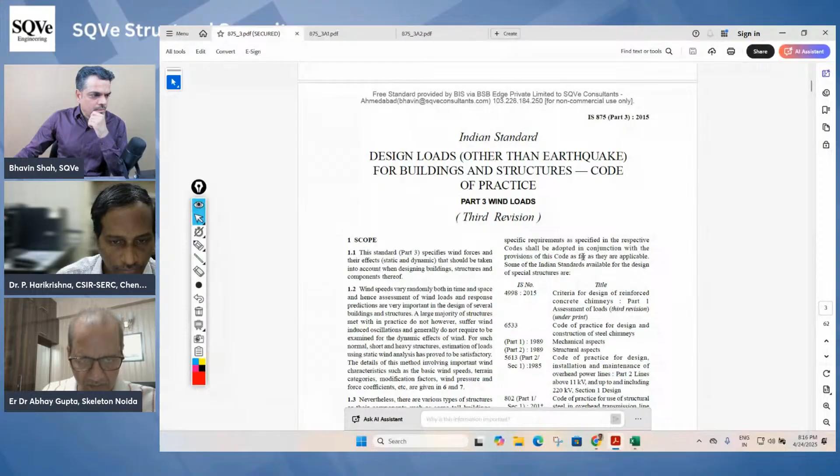Whether full screen is shared? Yes. Just zoom in a bit, make it a little bigger. Good.

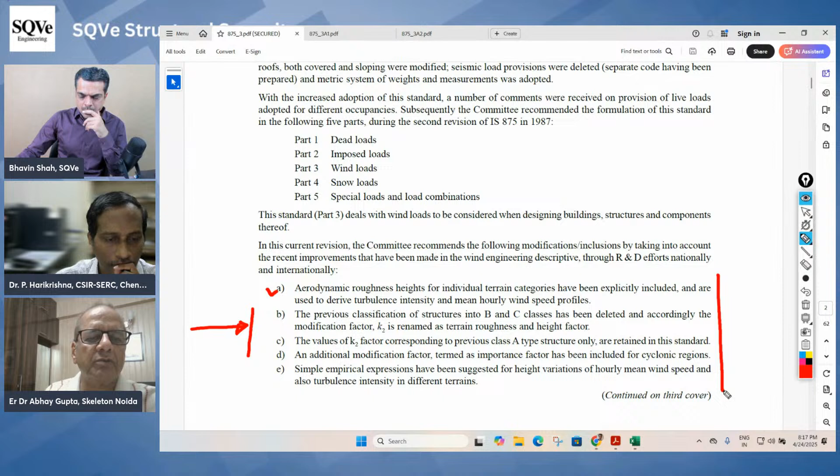Friends, just read the foreword of this code itself. Go up please. Here, just below, last para, below this load list, below this - yes. In this current revision, the committee recommends the following. These are the points which Dr. Harikrishna has just mentioned. So I will always recommend users, whenever there is a new version of the code, you should look for this particular para in the foreword. This gives a summary of all the changes done in the document. This is a good thing. So when the next version comes, again there will be a write-up here about all the changes made. Go down.

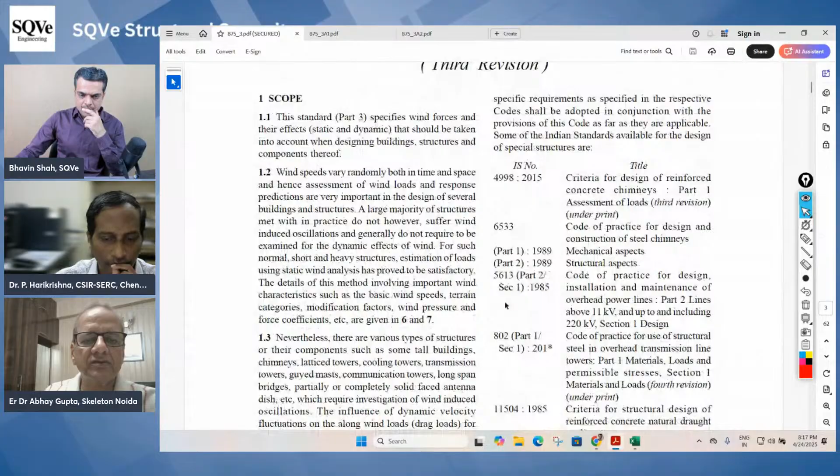These basic things will remain the same - scope and application. While making the final draft, we will see if any word or statement needs to be changed. But otherwise, more or less this introduction, reference, and terminology is going to remain the same.

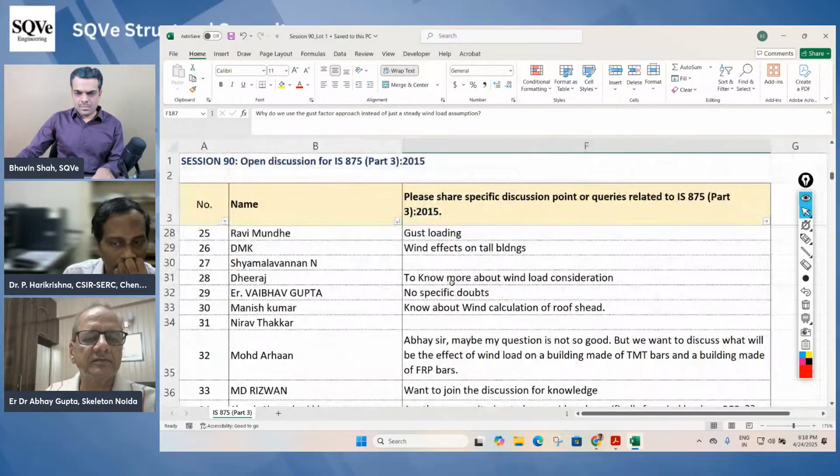Wind load calculation on transmission or communication towers. Dr. Harikrishna, would you like to elaborate on this particular point, how is this covered in 875?

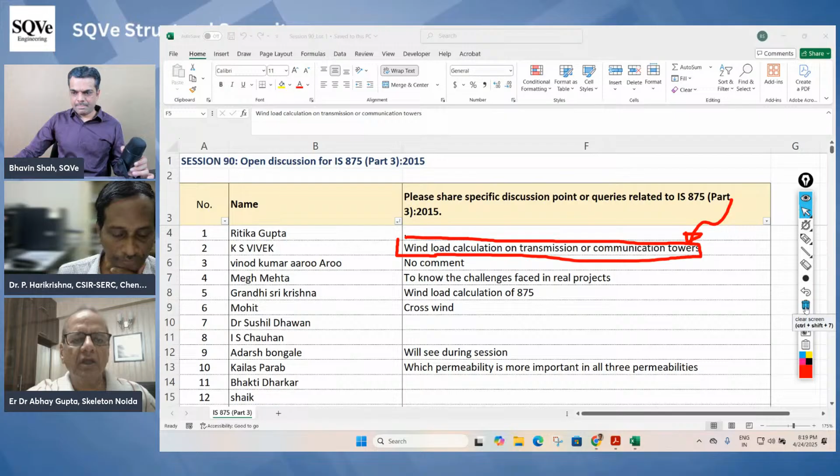875 Part 3 is more like a parent code, and there are additional codes of practice depending upon the type of structure. For example, IS 802 addresses transmission line towers, and very recently one more code has come that addresses communication towers. So the parent code remains IS 875 Part 3, but there are specialized clauses depending upon the type of structure through these additional codes of practice. Transmission tower is 802, and communication tower - I forgot the number, it's a very recent one - 16834 or something like that. That's available, and a very good thing is that all codes are available for free download for users nowadays from the BIS website. You just need to register and then download the things.

Regarding item number 5, wind load calculation of 875, I'm not going to deliberate on this much, but just for information, there is a handbook which already exists, SP64, and this updated version of that handbook will also be prepared simultaneously as the revision in the code takes place. So that handbook will provide proper simplification and explanation of the clauses, and even the wind load calculation for various structures will be there.

Coming down, which permeability is more important among all three permeabilities? All three means there are two permeabilities... is there a third one, Dr. Harikrishna? It is not like one is more important than the other, actually.

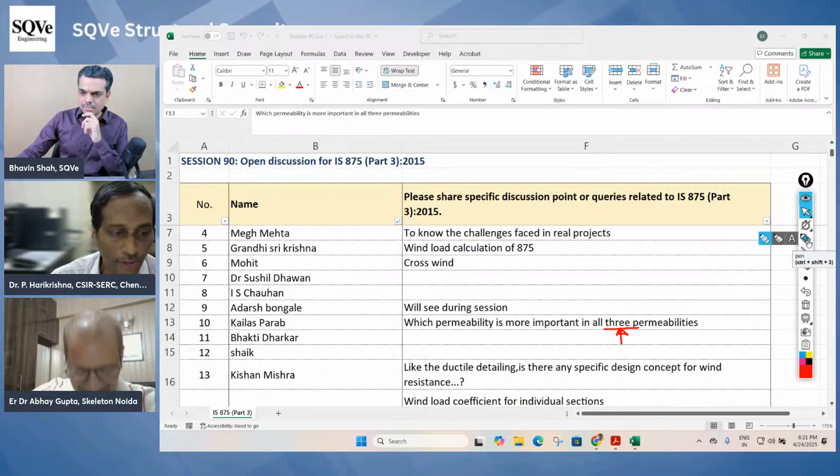It means there are three categories: low, medium, high. In reality, as a design engineer or end user, the building-specific permeabilities will be there, so it's not about which is important. You have to choose the category based on the number of openings in the building wall. The permeability has to be calculated based on the area of the openings on the walls relative to the total area of the walls.

To explain further, the wind flow pattern and wind pressure inside the enclosure change depending on the area and placement of the openings, and on whether the wind is leaving or entering the structure. That's why there are plus and minus values - pressure will be there and suction will also get created, and whether it is low, medium, or high depends on the area of the openings.

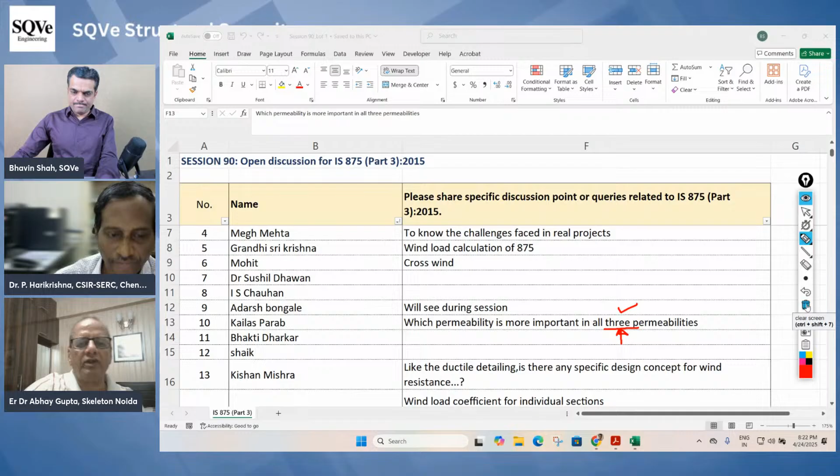For more detail, when you actually calculate, you will get to know. But you have to consider the entire area of the openings relative to the entire area of the walls. It is not for a specific wall - this is for the entire enclosure.

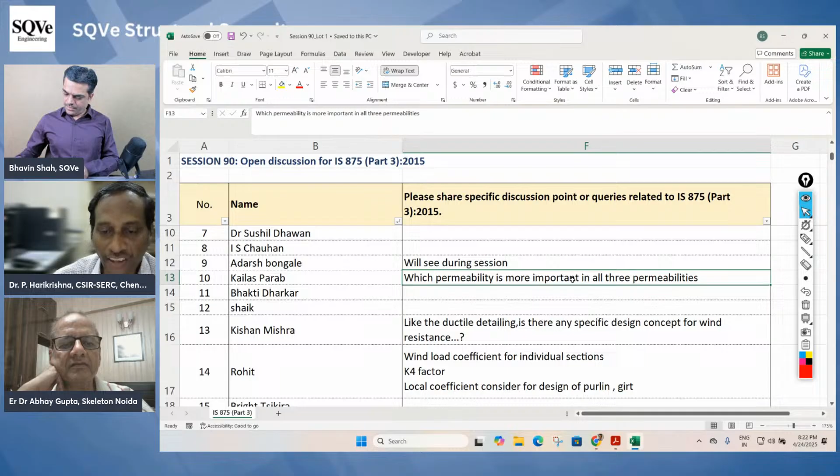But the assumption made in the code of practice is something like a worst case scenario. That means suppose there are 4 walls - one wall's opening got damaged, like during cyclones, while the other walls' openings are not damaged. That is the worst case scenario assumed, and corresponding values or magnitudes of coefficients are given in the code of practice. Whereas in reality, damage can happen to openings during a cyclone on more than just one wall - other walls' openings can also get damaged, but for conservative design purposes, it is assumed that the opening on one wall is damaged and all other 3 wall openings are intact.

That is the assumption. Now, point number 13 - regarding ductile detailing, is there any specific design concept for wind resistance? The basic philosophical difference between seismic and wind is that in seismic design, you go into the non-linear range of behavior, while wind, being a more frequently occurring daily phenomenon, causes the structure to behave elastically. So in wind design, there is no ductility concept or ductility requirement.

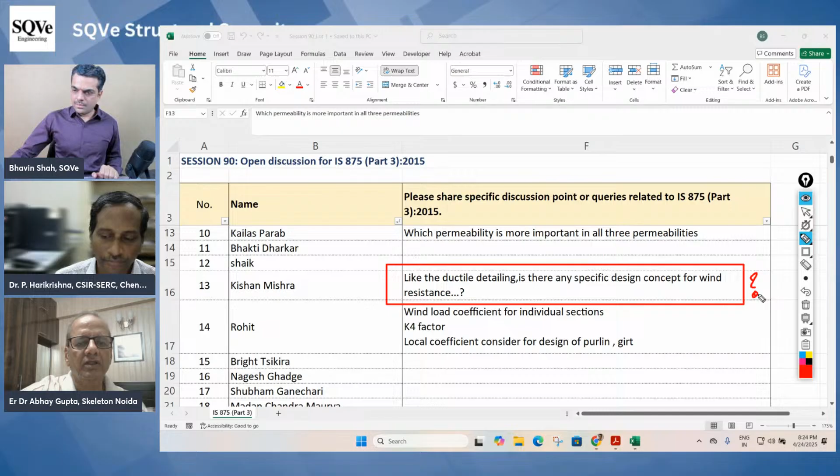Wind load coefficient for individual sections - it's already there, and I expect more or less no change will be made. Now, the K4 factor.

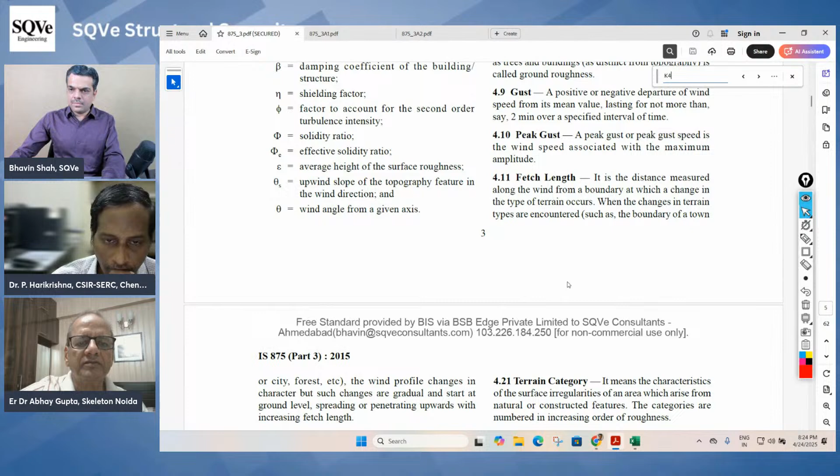K4 factor - Dr. Krishna, you can elaborate more on this. Can we see that clause, the K4 factor? Please scroll down. Next, yeah.

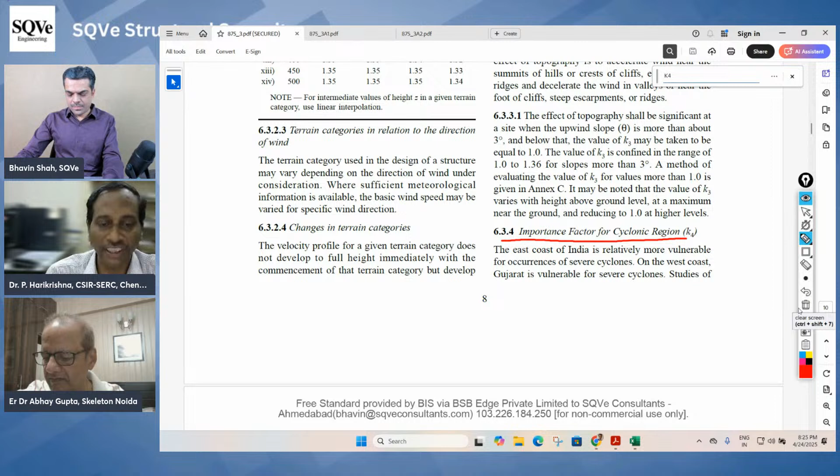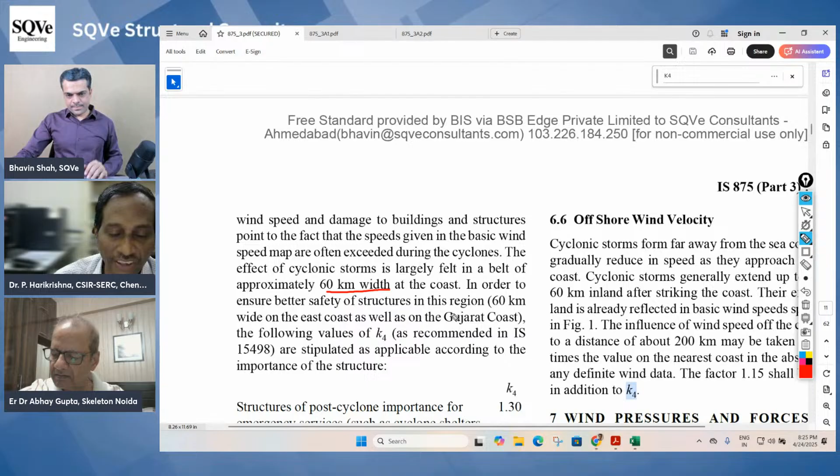This is another factor which was introduced in the 2015 version, which I didn't mention in the earlier remarks. It is basically limited to the coastal regions of India, mostly on the east coast and also the Gujarat coast. About 60 kilometers from the coast, this factor has to be applied. The magnitudes are derived based on cyclone wind speed data, and the factor derived on a design basis - rationally, a factor of 1.3 is arrived at and recommended.

One more rationale adopted here is that this 1.3 factor needs to be applied only for post-cyclone important structures, so we don't want to overtax this factor. Suppose a 1.3 factor on velocity means forces will increase by the order of 69% - that means around 70% increase in the loads.

So this does not warrant us to adopt it for every building and structure, but this 1.3 factor is recommended for post-cyclone important structures like cyclone shelters, hospitals, schools, communication towers, etc. That means these structures are not expected to get damaged during cyclones, so they continue to function even after the cyclone. For general buildings and structures, it is still recommended to take only 1.0, as good as any normal non-cyclonic region. That means even though some damage levels are expected during a cyclone, they are acceptable for these general structures.

Between 1.3 and 1, one more factor is introduced, that is 1.15, which is again a ratio between 1.3 and 1. It is a simple design rationale, and it is recommended for industrial structures, because industrial structures are the ones which collapse or get damaged during cyclones, and they have post-damage implications. That is the reason this additional class is introduced.

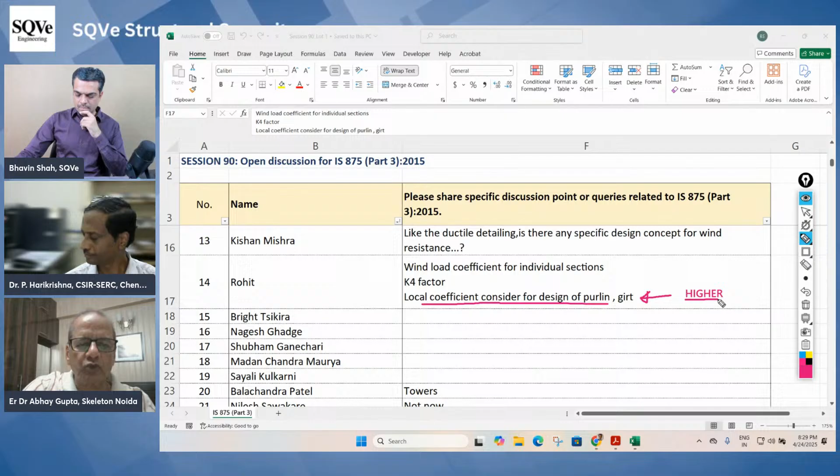Purlins and girts cover a smaller area, while when the same force gets transferred to the main structure, it is distributed from a larger number of elements, so the net effect is lesser. So for the design of the main frame, the area averaging factor will reduce, whereas for local members it will be higher. Moreover, for purlins and girts near edges, corners, ridges, and peaks, where local peak pressure coefficients are given, we should check the design for those local peak pressure coefficients, either by increasing the section or by reducing the spacing of members in those zones. That care should be taken, because otherwise the cladding starts coming out from that corner.

Okay, go down. Towers already explained, there are two separate codes.

Teaching profession, want to acquaint with the latest in wind engineering? Yeah, these are good documents for you, this code and the handbook, and some more structure-specific codes.

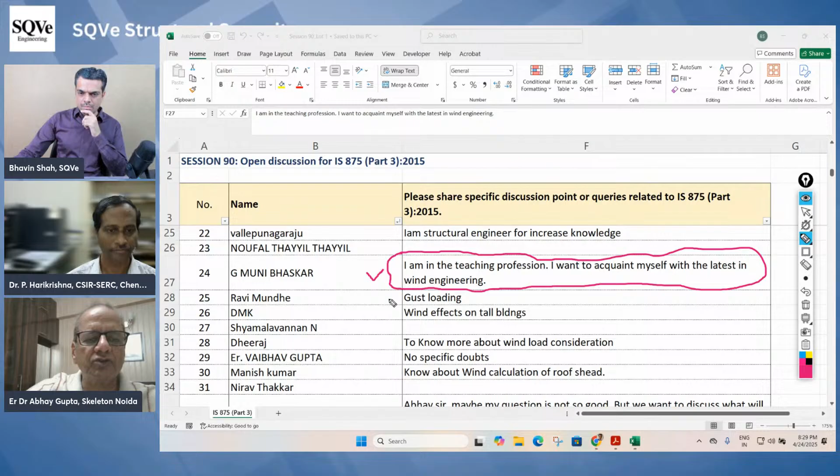But occasionally there are some short-term programs being run by SERC Chennai, under Dr. Krishna and other team members. So whenever you get information of that kind, you can keep in touch and make good use of them.

Gust loading is already there as far as along-wind is concerned. Crosswind is also there, and as such, we do not expect any change in those formulations given, except—Dr. Krishna, what about the crosswind? Are we going to make some changes in the crosswind? Because we are facing difficulty. As a user, I am also facing difficulty with the crosswind. Yeah, I mean, crosswind is more like a wide open challenge.

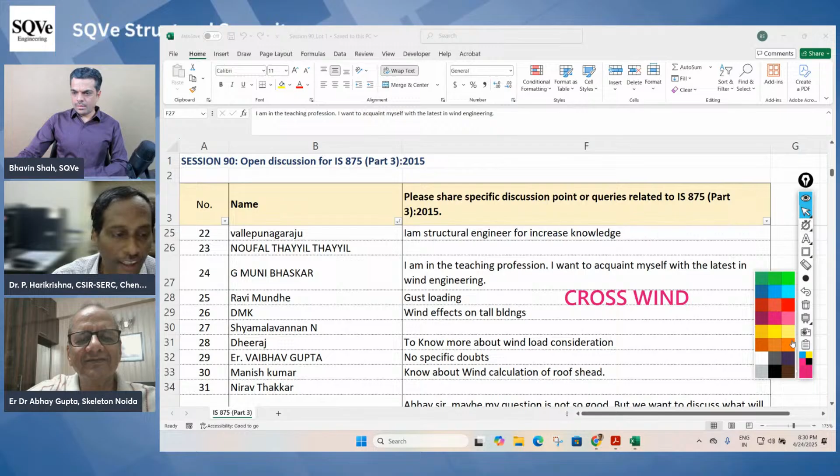That is the reason most codes, for example if you take the American code, ASCE 7, clearly state that they don't make any recommendation for crosswind load calculation, but recommend approaching database-assisted design approaches. That means there are some authentic websites maintained by reputed American universities, and you approach that website, and whatever results are provided there, you can borrow and use for your design load calculation.

So that is the case of ASCE. And whatever current version of IS code provisions are for the crosswind spectra, they are actually borrowed from the Australian code, but they are very limited cases only. But if I take parallel reference, the Japan code and ISO code are well ahead relative to other codes. More rectangular building cases were tested in wind tunnels, and the codal recommendations cover at least a wide range of cases, unlike the Australian code, which is very limited.

Which are those documents you just mentioned? Yeah, ISO and Japan code. Yes, wind load code. So is this ISO wind load code available to the public? No, it is not available to the public, you can procure it by purchase or something like that.

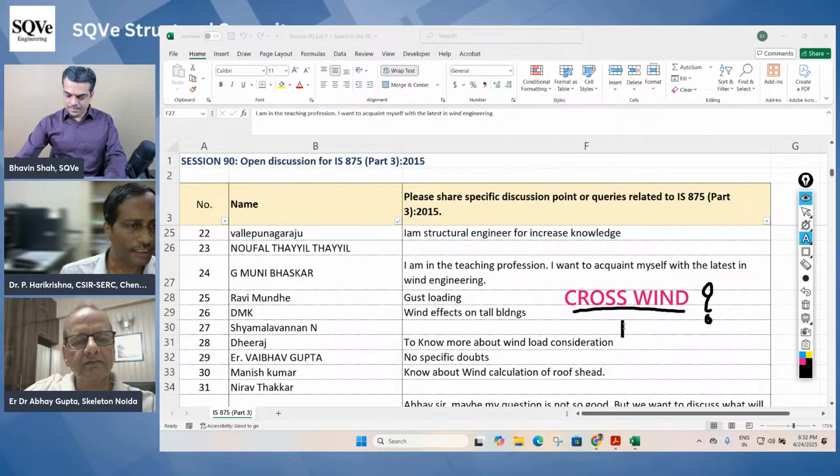ISO 4354, and the other one is the Japan code, AIJ, which is recommendations for loads on buildings. So these two documents can be referred by users for more clarity on the phenomena.

Thank you. In the current revision, we are going to take help of these two codes and look at the commonalities and better provisions if anything is there. We will be adopting those things.

And apart from that, I want to add that at SERC we have taken up a new ongoing project adopting machine learning techniques. We want to provide a user-friendly solution for this complex phenomena, that is crosswind force spectra.

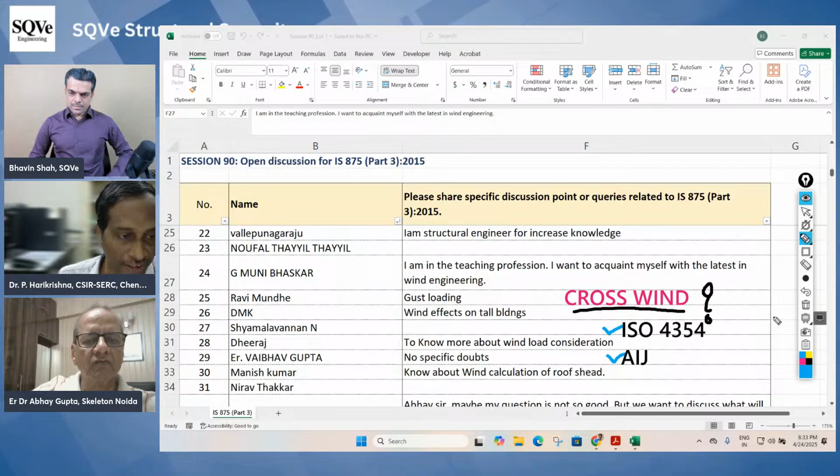Excellent. Thank you. We can also include the names and numbers of these reference documents in the foreword when we come out with the new revision.

Next, no specific query about wind calculation of roof shed. That is a separate thing, it's already there. But sir, maybe my question is not so good, we want to discuss what will be

the effect of wind load on a building made of TMT bars versus a building made of FRP bars. As such, no effect, because wind doesn't get changed due to the internal reinforcement nature. It is basically a surface phenomenon which depends on the geometry, shape, exposed area, all those things. So reinforcement will not make any difference.

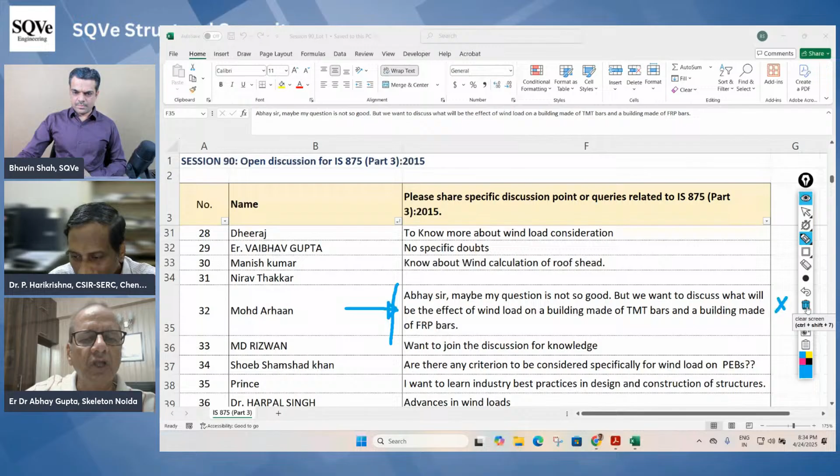Are there any criteria to be considered specifically for wind load on PEBs? Many of the charts and tables given are applicable to PEB sheds owing to their geometry, shape, size and dimensions.

So you can very well pick up all the CPE external pressure coefficients and internal pressure coefficients from the current knowledge and information available in the code.

Advances in wind loads. As Dr. Harikrishna has said, there are many new things which have come up in the last 10 years since this code was there, 2015, and we'll be trying to accommodate them.

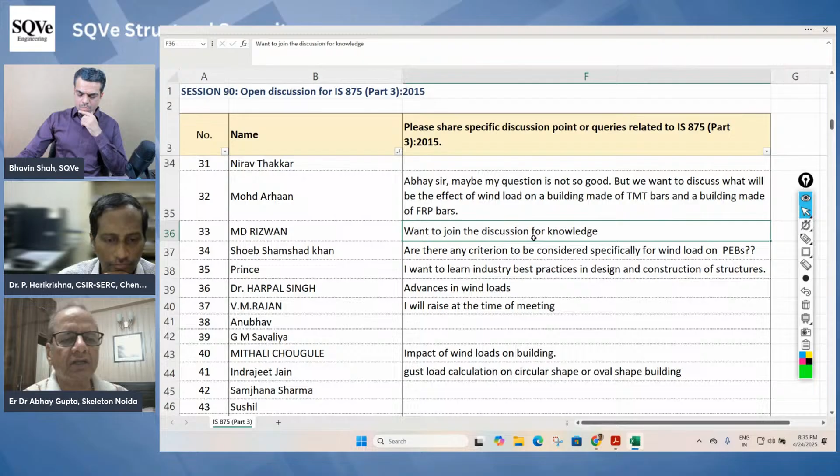But if you want to know more about that, I think Dr. Harikrishna, if you can suggest some good reading material from where a user can get more information about wind load. One is about the regular conferences.

We have books, and there's a national conference on wind engineering every year. A very famous author is Simiu and Scanlan, and Professor Simiu, American professor, has two books published, and the latest versions are the preferred ones.

And apart from that, one more book by Professor John D. Holmes, Australian professor. So these two books are preferred. But I think the Australian handbook is also a very good document, it gives examples and the concepts behind the clauses available.

And there is an annual wind engineering conference happening in India. This time in November it is going to be in VNIT Nagpur. That annual event attracts many good people from across India and outside also, so you can certainly participate.

Mr. Rajan, I'll raise it at the time of the meeting, please type your queries and then we'll see them. Sir, parallelly there are queries being typed in the chat box. Sri Subramanian Narayan sir has also already raised a few comments. Okay, okay.

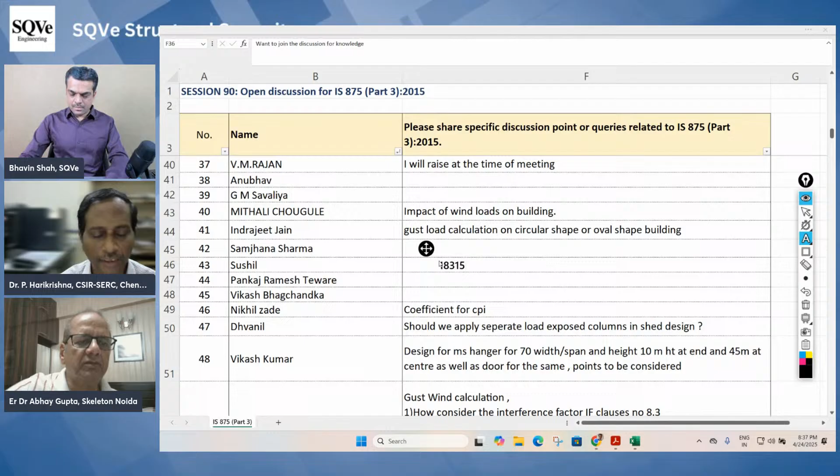Is it that Arnab Sarkar worked on this? Yes sir. So what was done is that whatever K4 factor is there right now in the 2015 version, it was actually derived way back in the 90s, using whatever data was available at that time.

And subsequently, in the recent past, a similar exercise was carried out by Professor Arnab from IIT BHU. It has corroborated or reconfirmed that those values still hold good with additional data available. That exercise was sponsored by the Bureau of Indian Standards, and subsequent to that exercise, a new code was introduced, 18315.

So for the K4 factor, it is actually the same as whatever is currently in practice, except that it is now given in a formula form. That's all.

Saurabh Gupta is asking, there are many times when we see a mix-up of codes, IS wind with AISC design. In AISC design, due to 700 years return period, wind coefficient reduces in load combination. What should we practice and advise for those? What is this, sir?

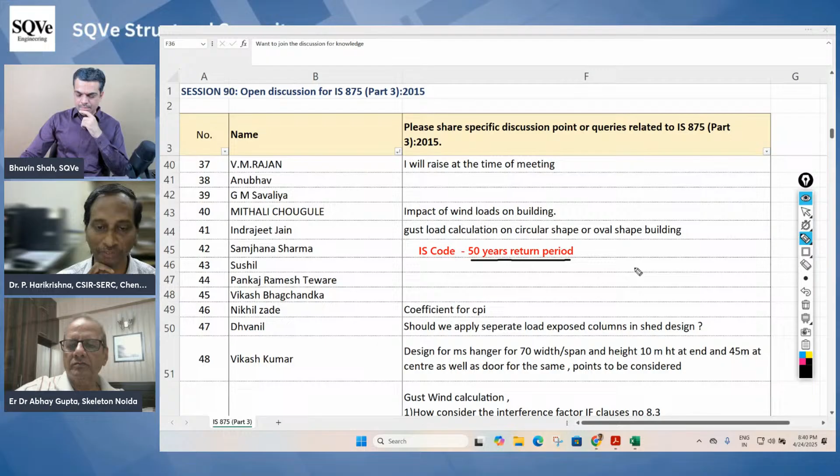We should not pick and choose parameters and values from different codes and then try to evaluate and compare. I'm sure you will end up with a wide scatter.

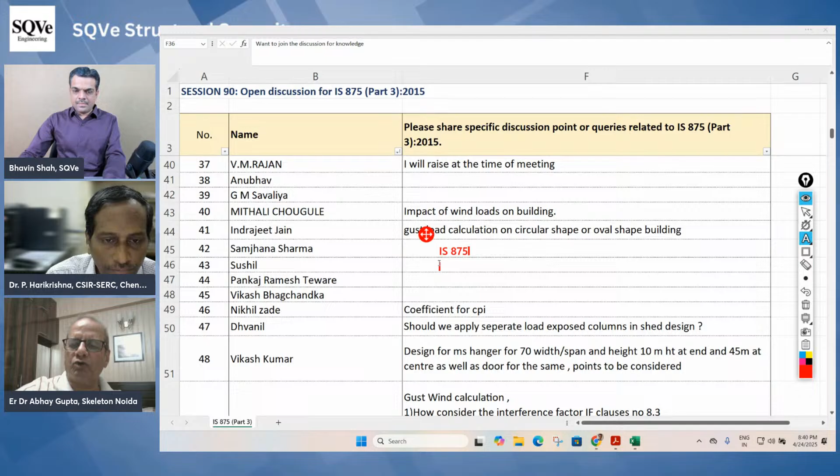Mr. VM Rajan has raised a very good point that for arriving at mean wind speed and gust, IS 875 part 3 uses 3 seconds and 1 hour for static and dynamic methods. But as per Eurocode, 10-minute interval is used for both methods. Why so variation in our code?

It is similar to return period, which is a yearly basic thing. The other point is that within 1 hour, wind fluctuates. So for that, there must be a reference averaging period. We call it the averaging period.

Since wind is a dynamic and random phenomena, it continuously changes with time, but we should fix a value. For fixing a value, the reference is: one, at what height should it be measured, and second, average over what period. These two questions should be kept in mind when we state any number about wind speed.

The guidelines are that mean wind speed can be averaged between 10 minutes to 1 hour. That is one guideline internationally. So you can choose anywhere between 10 minutes to 1 hour to address the mean wind speed. IS code uses 1 hour, Australian code uses 1 hour. Whatever point was raised, 10 minutes is used in a particular code. There are other codes where they use 20 minutes also. So it varies from code to code, but what you should keep in mind is that they represent the mean wind speed.

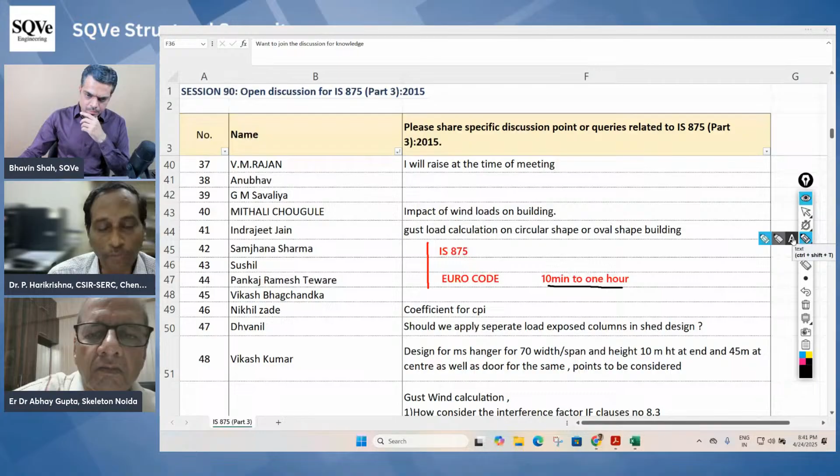Similarly, 3-second gust is a short duration we call it, with averaging period of 3 seconds. If you approach other international codes, you may see other than 3 seconds, like 5 second, 10 second, or even 1 second. So there are different notations and definitions. You should compare oranges versus oranges only, never apples versus oranges.

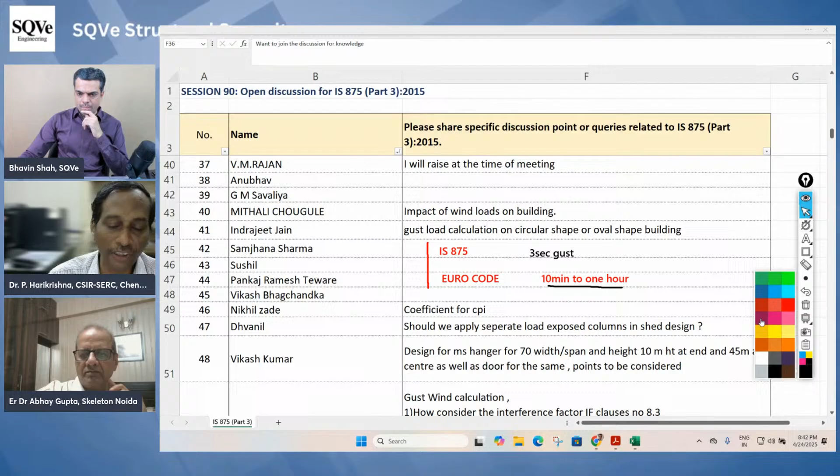If the codes have different return periods or different averaging gust periods, the magnitudes should not be compared directly. You should bring them to a common platform. There are conversion factors available which you can adopt. If I want to derive 10-minute wind speed from 3-second gust, I can derive it, and similarly if I know 10-minute wind speed, I can derive the 3-second gust wind speed. So you should bring them to a common platform, only then can you compare across international codes. Till that time, it is not recommended to compare design wind loads from one code to another.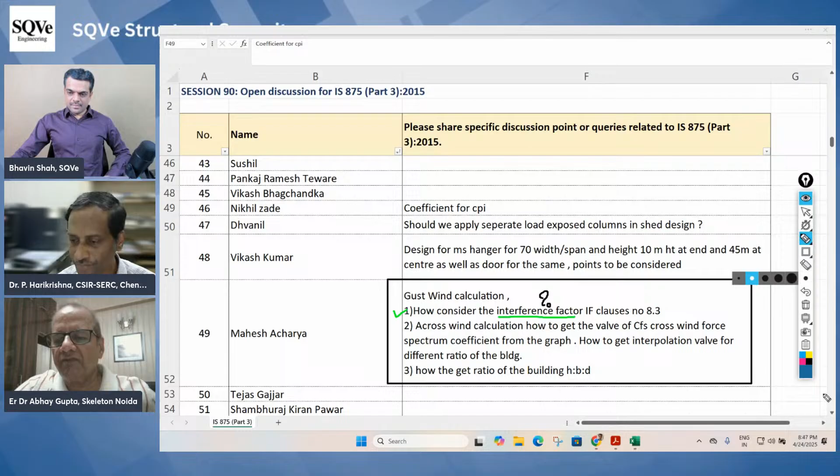Dr. Subramanian is saying, due to global warming, the wind loads are increasing worldwide. Will the new code increase the wind loads due to this? In fact, rain intensity is also increasing. I think there is more data available from IMD, but how well is the effect captured? Dr. Harikrishna, do we have any information?

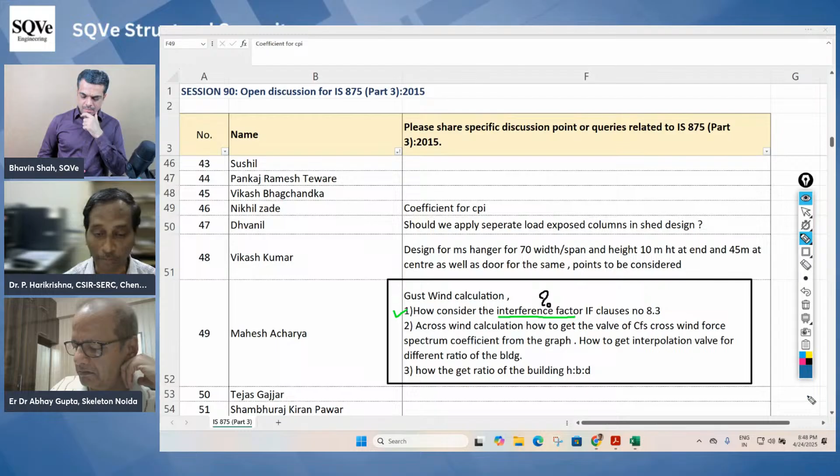Yeah, it is a rapidly changing phenomenon, this global warming or climate change impact. If I take 1990 to 2000, 2000 to 2010, and 2010 onwards, looking at the Indian coast, especially the cyclones, we hear very frequently that a cyclone formed and crossed the Indian coast. Earlier, between 2000 to 2010, I rarely heard about many cyclones. Very few were there. In 2013 I remember one, in 2017 as well, whereas subsequently it is happening every year. The magnitudes may not be significant, but with more frequency, there is more chance of high intensity wind happening.

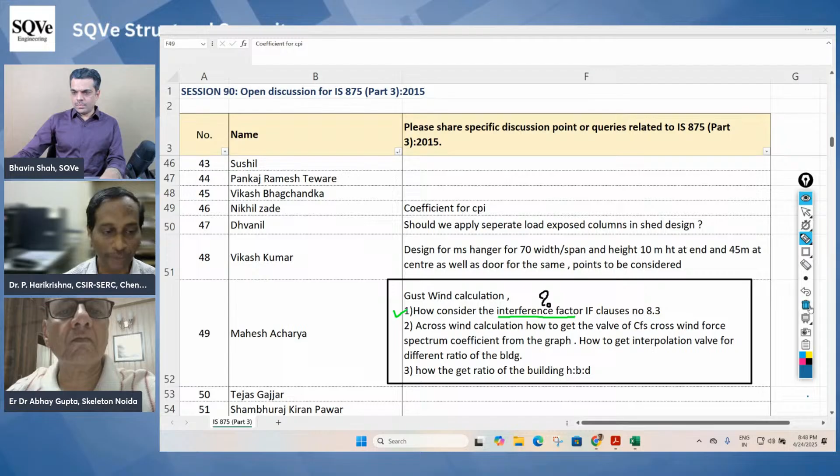So the point raised by Dr. Subramanian Narayanan is how do we address it? Till more reliable data is available, if I take the example of the Australian code, they introduced a factor called the climate change factor. It says you apply 1.05 on any design wind speed, which is only rational, just a 5% increase. What we are trying to do is that if I choose a higher wind speed or higher wind load, I am trying to minimize the risk, reducing the risk level. People think that whatever wind loads, earthquake loads, or other environmental loads are estimated through code, those are not fixed values, they are only probabilistic values. So choosing higher values is on the conservative side so that I can reduce the risk.

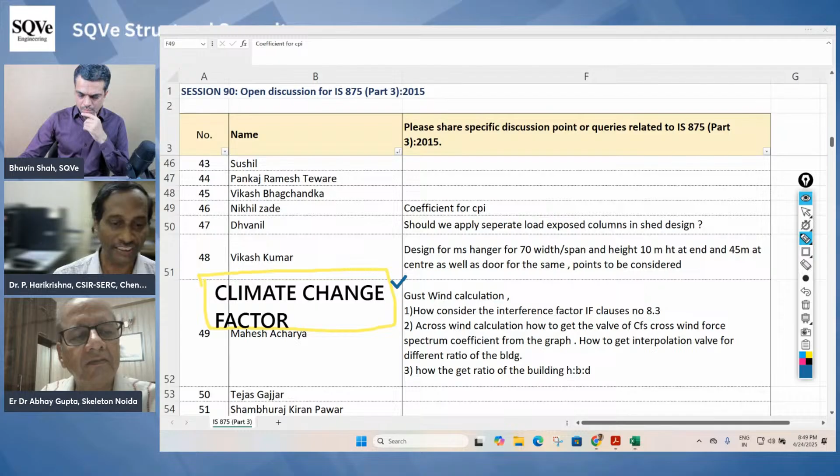For example, before the knowledge of wind engineering existed, there were a lot of tall buildings and structures like the Eiffel Tower. They were all constructed before wind engineering became a specialization. So how could they have constructed such an iconic tower that is still standing the test of time? The reason is that when the knowledge is not there, we need to adopt some additional factor of safety to address the uncertainties. Sometimes these factors of safety are called ignorance factors.

Similarly, with this global warming, I feel it is a rapidly changing phenomenon. The data availability is more like recent past, about 10 to 20 years. If I want to extrapolate with that limited data to 100 years or 50 years, there are reliability related issues. Till that time, people can adopt rational factors.

The next question from Mr. Mahesh Acharya is about the crosswind calculation. How to get the value of CFS, crosswind force spectrum coefficient, from the graph? Can we just see that crosswind force spectrum graph in the code?

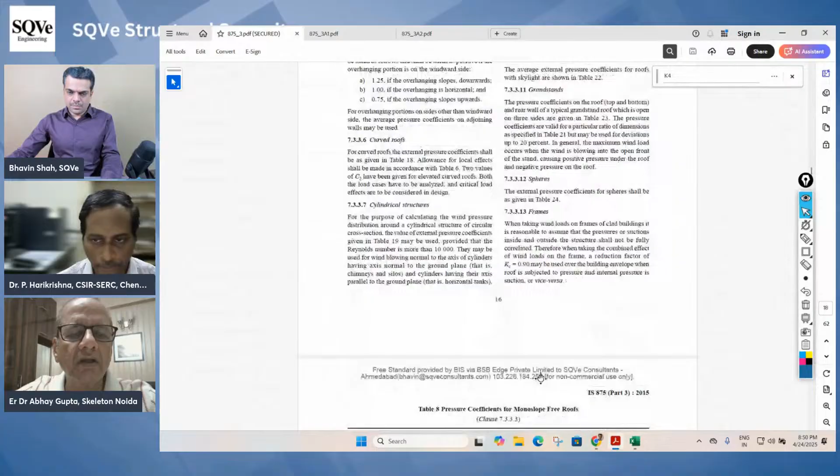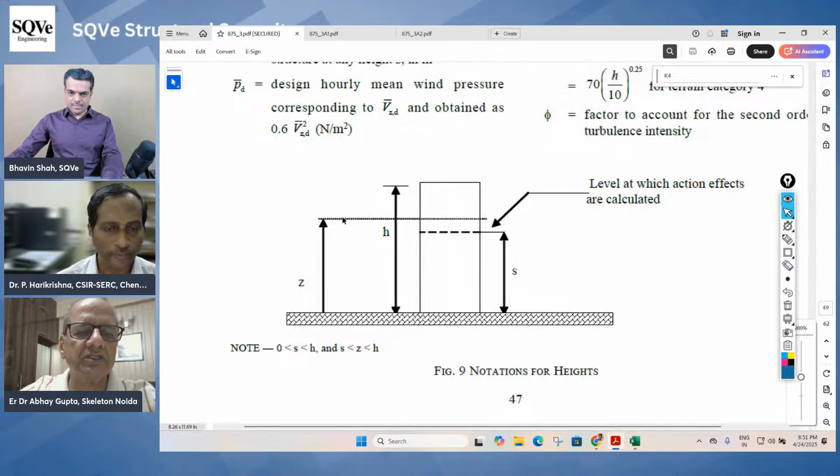Yeah, it will be much below, almost at the end. Before crosswind, because we are moving to that clause, Sri Harshal Goyal raised a question earlier on head-on case. Yes, there is one picture here. Go up, slightly... yes, this one. Can you zoom this in? Zoom in please.

Harshal is asking to elaborate the difference between Z and S. So let us say S is not there, S equal to 0. My interest is, see, this is like a cantilever structure which is vertically mounted. On this cantilever beam, wind acts laterally. If you imagine this cantilever beam in horizontal form, the lateral load will be vertically acting. This load is temporally changing with both space and time.

So it is a random phenomena. From that, I am trying to get a peak load effect at the bottom of the building. So there will be a lot of correlation related issues. Things can happen in a localized manner. The peak effects will be localized, and reduced peak effects will be there at a global level. So to address that aspect, this factor small s is introduced.

So let us say if I make S equal to 0, it means my point of interest is that at the bottom of the building, what should be the column size. So that is the focus. Let us say S equal to foundation force. Suppose S is not 0, but something like 0.5H. That means at half the height of the building.

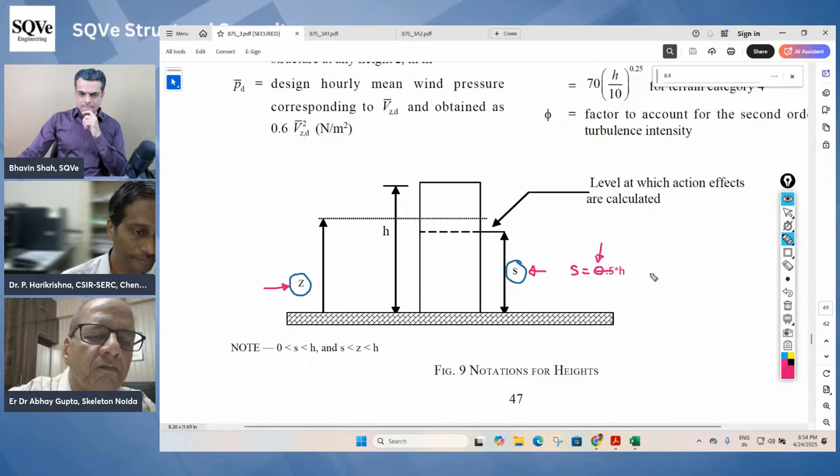Z, small z, is more like a variation of load along the height. Suppose small s is equal to 0.5H, the small z will vary from 0.5H to full H, 1H. So your load distribution varies. That is, small z is like variation of load, it varies between S and H. Yeah, it is mentioned at the bottom of the figure also, there's a note given.

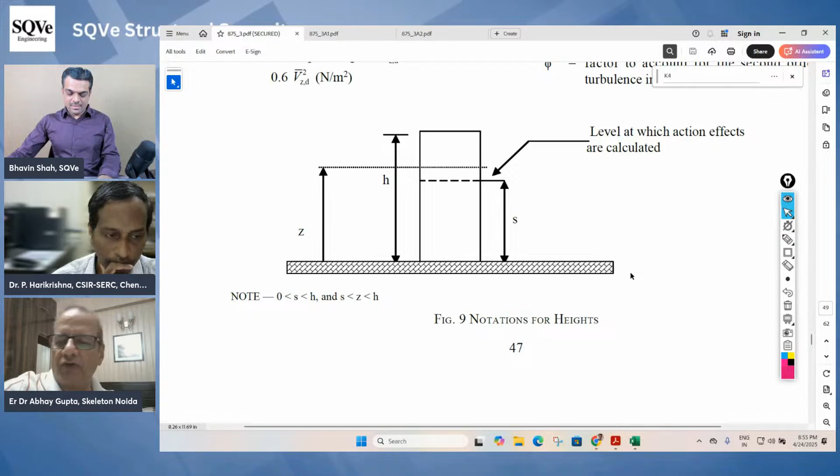Dr. Subramanian is saying one point on the next page, crossing on the spectra. Next page, page number 48, GR and GH formula, should 3600 be replaced with 600 here itself? So the implication, I didn't get it, can you repeat sir? So there are two expressions here, GR and GH on this page. Yes sir, there is a value of 3600 given there. Dr. Subramanian is saying, should we replace them with 600?

As highlighted earlier, the mean wind speed definition varies - different people use 1 hour or 10 minutes. 10 minutes means 600 seconds, 1 hour means 3600 seconds. Since IS code reference is 1 hour, that is the reason we are using it. Whereas if you take Australian code or some other codes, 10 minute reference will be there, they substitute 600 seconds.

So the equation for MC in Australian New Zealand 1170 is completely different than IS 875 part 3. MC is the crosswind design peak base bending moment. If you see below that formula explanation, where PH bar is one parameter - if you see that Australian code, they have shifted PH bar to PH. PH is 3-second gust wind speed.

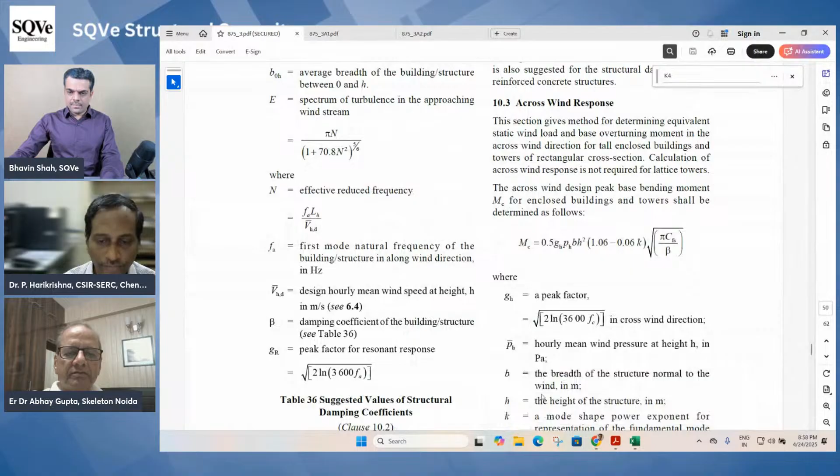Okay, we go back to the Excel. There was one point here in the code itself for which we open that crosswind force spectra diagram, below this. So how to get the value of CFS here?

For CFS, you need to calculate this V bar H over FCB. This is called as reduced velocity, or non-dimensional velocity. You can very well see that for this particular shape, 6:1:1 or 9:1:1, which is practically a square, tall square cylinder, there is a peak which is seen around 8. If you see on the x-axis, there are two 6's typed, but actually the second 6 is 8. So around 8 there is a peak.

This is the resonant - around 9 it is the peak where resonance is occurring. Crosswind phenomena is largely governed by the vortex shedding frequency. That varies with the building face width, the plan shape, and the dimensions. It varies with that and the height.

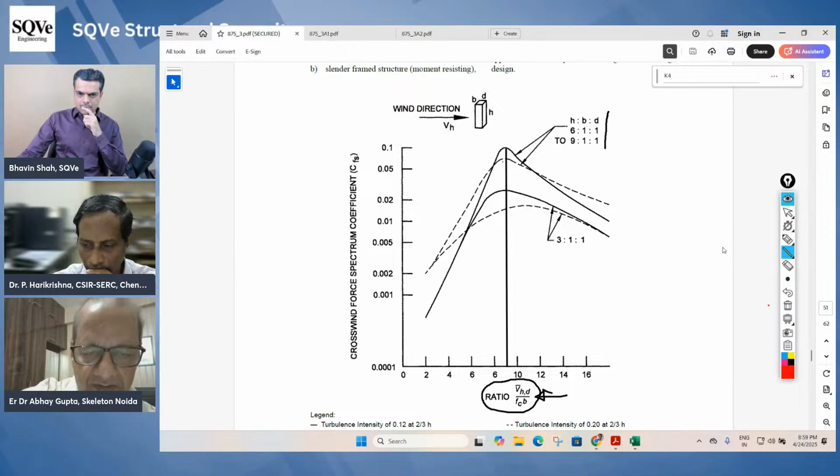Like here in the lower figure, the second one next - if you see, in case of 6:2:1, where the wind is coming on the wider face, there is a definite peak at around 9 again. But in case of a narrow long after-body cylinder, in this 6:1:2, it is the narrow face and there is a tail of the structure going, where there is a possibility of reattachment of shear layer, am I correct sir? Yes, and maybe because of that, the peak is not seen in this CFS curve in this wind range.

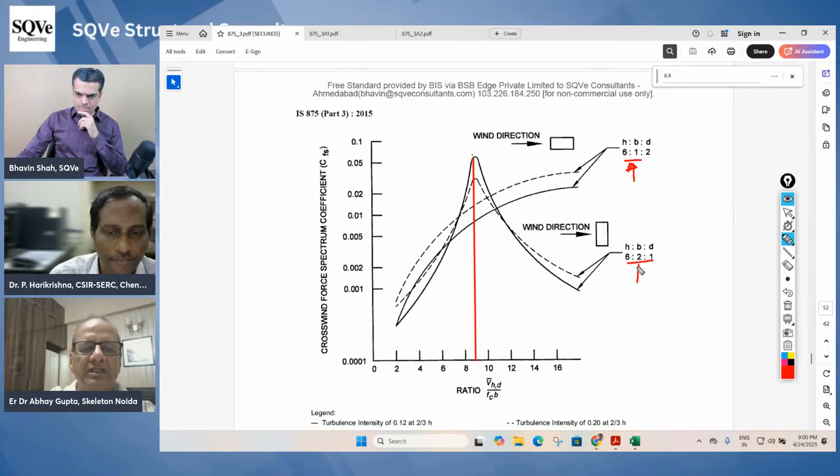So these are specific to the structures. If your structure is close to these geometries, then only you can get a rational assessment from these charts, the CFS value. If our structure is different, then the values would be much different. And then wind tunnel testing is the best solution, which should be taken up.

Anything else you want to add, sir? Yeah, so these are specific to those geometric proportions of the buildings. So other than this, these values are not recommended, even though at the bottom it says that you can interpolate for certain cases. So again, it is on the logarithmic scale basically.

There are some curves already put in polynomial equations in Australian code. So those formulas represent these curves, actually polynomial. So when you try to interpolate physically from the graph, errors can come inside, whereas polynomial equation substitution will minimize the mistakes. But using the database is more rational - available database is best.

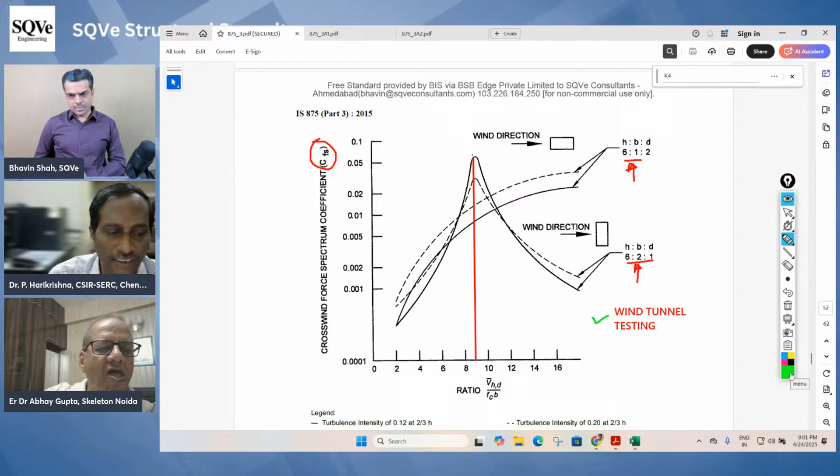The future is going towards that only. This is the crosswind and torsional spectra - they cannot be generalized, unlike along wind spectra. Their behavior could not be more generally defined or predicted. That is the reason the American code very wisely says they don't recommend this approach - it's literature based. So somewhere in the code we have to add that word of caution, because people are blindly following this.

We go back to the Excel sheet. Next page.

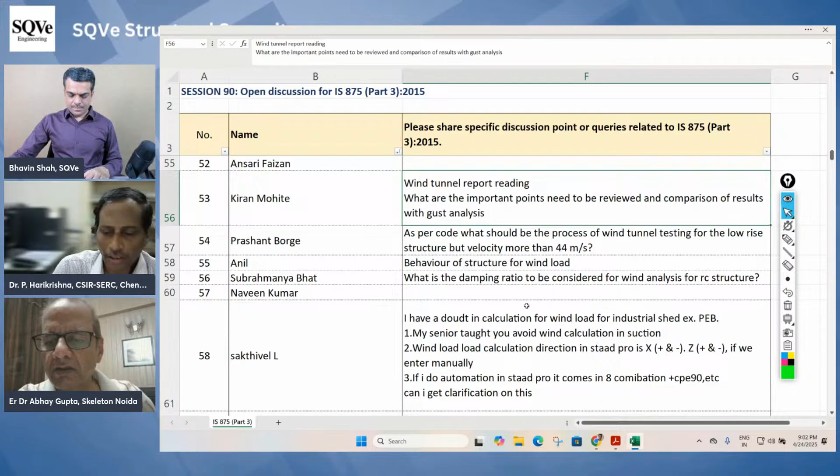There is a comment by Harshal Goyal that K, hourly mean wind speed, terrain category 1 - yes, he rightly highlighted that it's a typo actually. The 'one' is supposed to be 'I'. I think that was corrected in the amendment - two amendments came actually, but I'm not sure it is covered in either of those. It should be I, not one. That is a typo, yes.

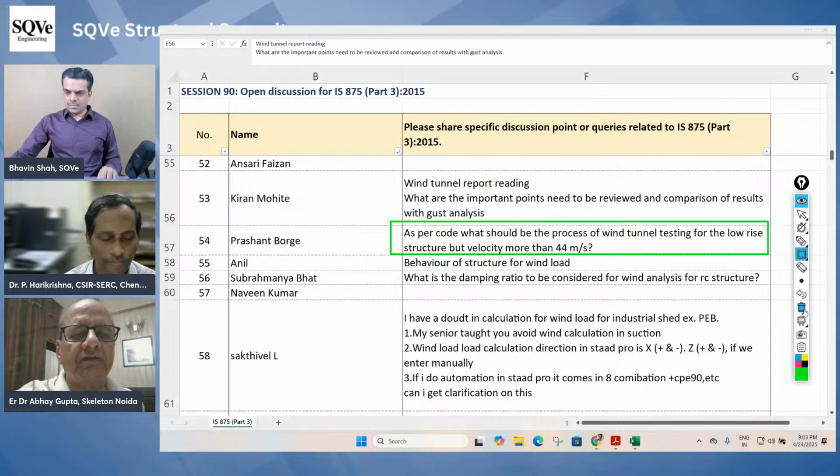Wind tunnel report reading - that will come into the guidelines. What are the important points to be reviewed in comparison of results? Again, that will be a separate thing. As per code, what should be the process of wind tunnel testing? Again, that will be beyond the codal revisions. Behavior of structure - what damping ratio should be considered?

What is the damping ratio to be considered for wind analysis for RCC structures? The code is already giving a table for this. So if you go back to the code, on the adjacent pages...

Go upward, previous pages. Not that - no damping there. Same location, but one or two pages earlier. There's a table.

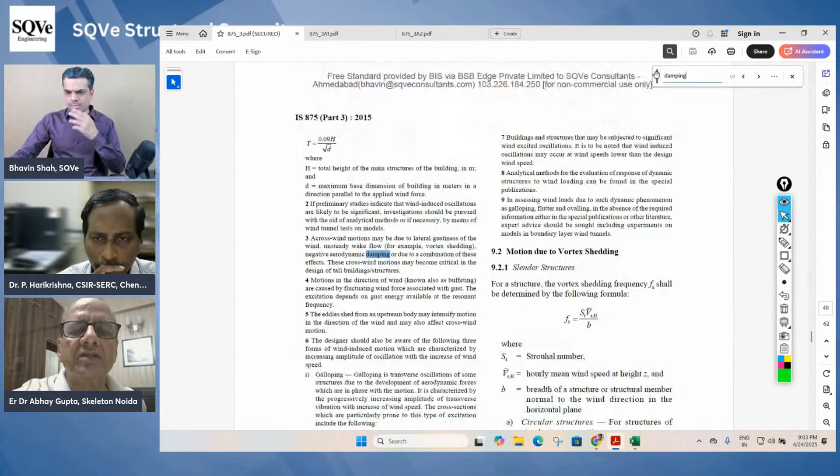Next page. Yes, this table given - what should be kept in mind about these coefficients is that this damping coefficient is not a constant for a structure. It depends on the magnitude of vibrations. Higher the wind speed, higher the vibrations; lower the wind speed, lower the vibration. Under high vibration amplitudes, the damping values will be higher, whereas at lower vibration levels, the damping magnitudes will be less. So if you look at this table, these magnitudes are meant for design wind speed level loads.

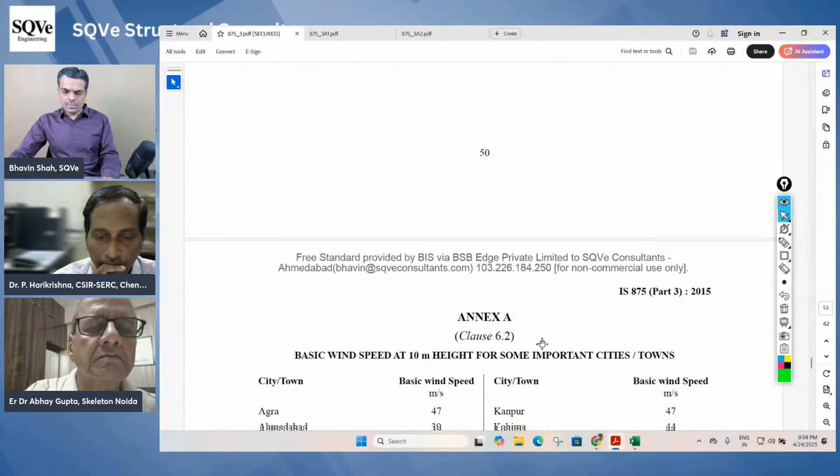But if you come down to the next page, further down - no, I think it's gone past. Sorry, go up, just above - yes, sorry.

I'll stop it here. So if you see from the top, this is for computing the peak acceleration - paragraph on the right hand side - 5 year mean return period accelerations. A 5 year mean return period leads to lower wind speed, and lower wind speeds mean lower wind loads and lower vibration levels. That is why a reduced value of damping is recommended there. So if your focus is on acceleration calculation corresponding to lower return period wind loads, the damping magnitudes are less, whereas at design wind speed level, the magnitudes will be on the higher side. So caution should be adopted when substituting the damping values.

Correct. While in case of earthquake, it is all 5% now. Earthquake design philosophies are different, because the building will undergo non-linear behavior - a lot of damage, or hinges will form. Once hinges form, it will reach the 5% damping level. So that 5% is not applicable here. There has to be a different analysis for wind and a different analysis for earthquake - the same model cannot be used for both.

The same thing happens with the time period also. The time period calculations as per IS 875 Part 3 and as per IS 1893 or IS 16700 are different. And certainly the time period in case of earthquake would be larger, whereas in case of wind, being elastic, the time period should be smaller.

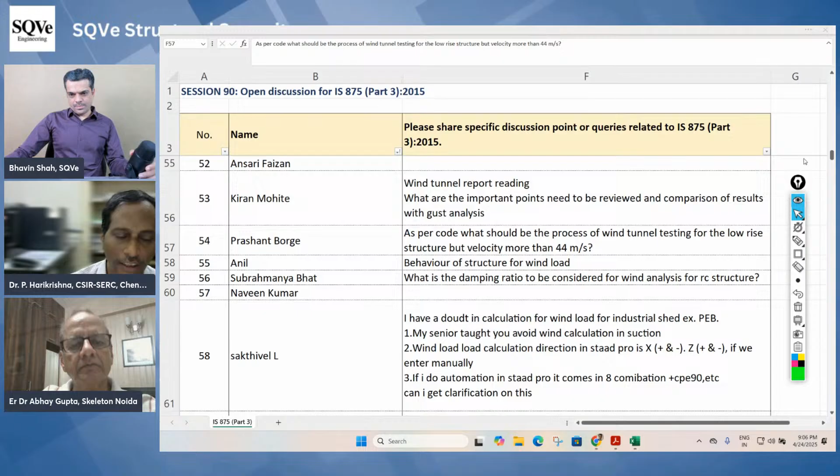Correct. I'll just take an example - we have to see it this way, that the spectra we call wind spectra, and earthquake spectra, for academic purposes they plot both curves on the same graph. So what can be noticed is that if I put x-axis as frequency, there's always what we call 'my left is your right' basically - so this time period and natural frequency relationship should be kept in mind.

People misuse time period and frequency synonymously. In wind engineering, we generally put the x-axis with reference to frequency, whereas in earthquake engineering they put the x-axis with respect to time period. Frequency is the inverse of time period, and time period is the inverse of frequency. That should be kept in mind.

Suppose if I maintain x-axis as frequency, and plot both wind spectra and earthquake spectra, earthquake spectra locates on the higher frequency region, whereas wind spectra lies on the lower frequency region. Tall buildings have lower natural frequency, whereas low-rise or short buildings have higher frequency. That is the reason low-rise structures are vulnerable to earthquake loads, whereas tall buildings are vulnerable to wind loads.

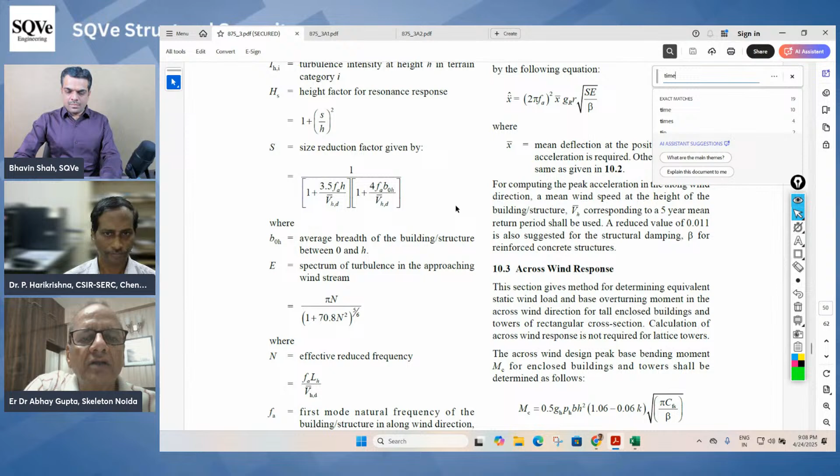But while calculating the time period in software analysis, if you calculate with IS 875 part 3, go to that section of IS 875 where the time period calculations are given, just above section 8.

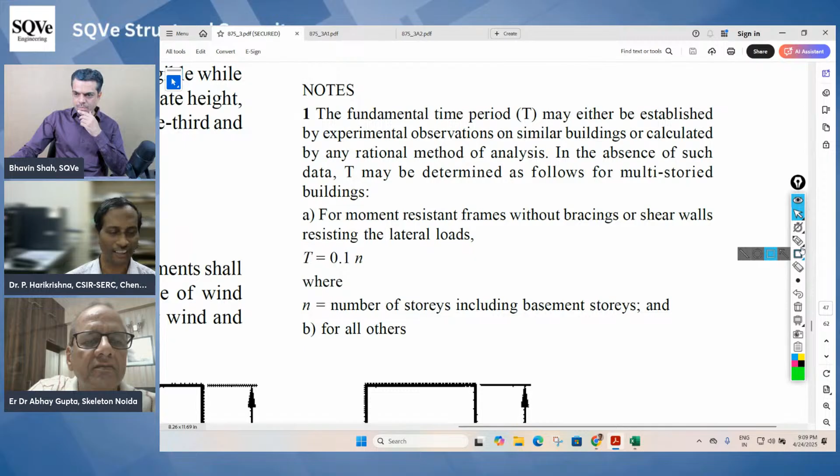So sir, these are more like thumb rules basically, from when calculators or tools were not there, but people are still maintaining these clauses, which is not really supposed to be the case. There are more sophisticated expressions coming up.

Even the earthquake or seismic loads code IS 1893 has additional formulas. If you come down, there are additional formulas also within the same code. So these are all more like thumb rules, these formulas are more like a thumb rule.

Very minimal information is substituted here, just H and D, two parameters. In reality, I don't expect that only those two parameters will govern the time period calculation. There are many other aspects that will influence the time period, which is more reliably obtained by doing finite element analysis.

But again, for finite element analysis, we need to give certain inputs. One of the inputs is the Young's modulus of the material. For example, reinforced concrete, which is a composite structure, has a Young's modulus that is a widely variable parameter, so there is a lot of uncertainty in real values.

If I do detailed finite element analysis for a tall building, I end up with a frequency. Tomorrow if I construct that building, and put an accelerometer to estimate the frequency, I don't expect it to match the finite element value. So the reality is that Young's modulus is one of the variables.

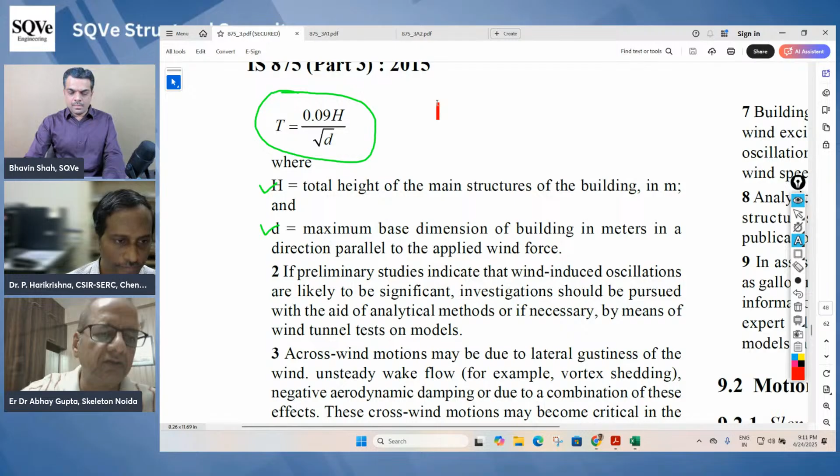We are able to put all the masses, but what should also be kept in mind is that in reality there are lesser cracks over the period of time, the life of the structure. It undergoes a lot of ambient loading conditions, so we need to keep the life of the structure also in mind.

But when you go for a tall building, basically we are trying to address this keeping the life of the structure in mind. Various possibilities are possible during the 50-year lifetime, so we should anticipate, envisage and find this at the beginning of the design stage. If my knowledge is more, I'll be more cautious; if my knowledge is limited, I'll be ignorant, so I'll be doing things with ignorance.

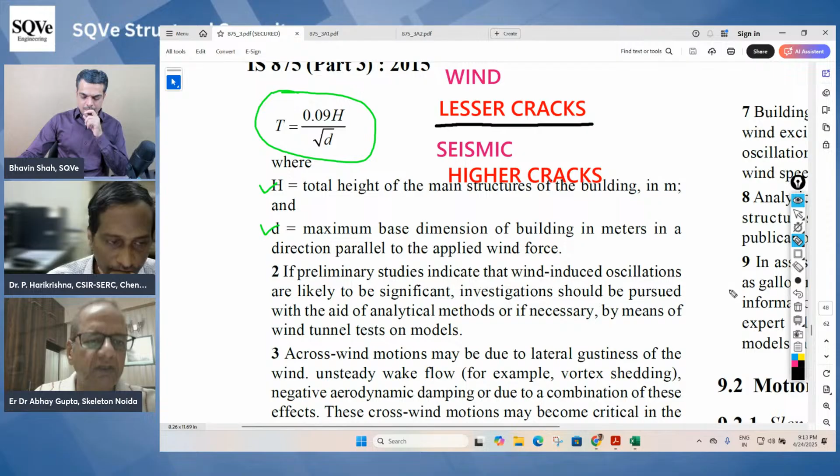There is a difference between these two cases. For tall buildings, IS 16700 is being used, which gives some expressions for the time period. But it doesn't say what will be applicable for wind and what for seismic - it says for both. It also states that a rational finite element model can be done, incorporating all the inherent stiffnesses of the structure. That is questionable, because not all stiffnesses are modeled in FEM. When discussing this with IIT professors involved in drafting 16700, they said actual stiffness is more than what you model, so these empirical relations are the upper bound, meaning the lower bound of the time period. So in my opinion, there should be a different time period for wind analysis and a different one for seismic analysis. Maybe we can elaborate more on this time period calculation in the code, since this is a very important parameter. Let's go back to the Excel sheet.

Saransh is asking to explain the effect of wind on time period as we relate for seismic analysis. I think we just discussed this point - it is not covered in the amendment.

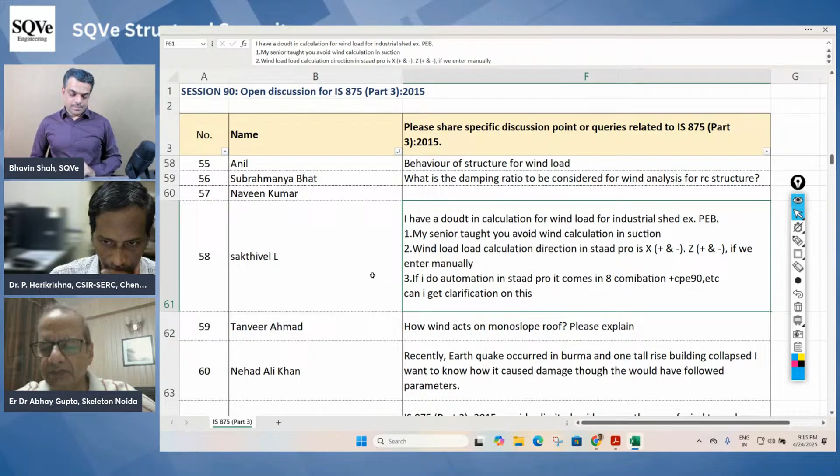What are the minimum criteria, except for height of building, for conducting wind tunnel testing? There are more criteria than just height. Wind tunnel testing should be conducted for any geometry which is not covered in this code. This code is only for prismatic, simple, regular structures. Nowadays architects are not producing simple buildings - they are producing fantasies. So all those should undergo testing irrespective of height. Even a low height building with designer facades needs to go to the wind tunnel. You cannot calculate those values using the IS code. The IS code can give you just preliminary guidelines for initial values, but ultimately you have to go to the wind tunnel.

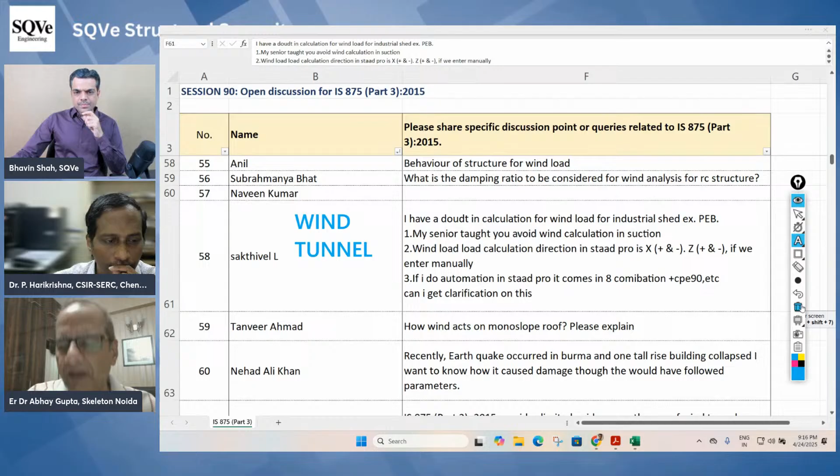Dynamic analysis is required for buildings and structures with a certain natural frequency in the first mode. Is there any modeling criteria to evaluate natural frequency? We discussed that - you can model as good as you can model. The only thing is, as Dr. Harikrishna says, you should take into account the stiffness modifiers also, meaning the cracked, reduced cross-sectional area, particularly in case of seismic. Maybe we'll elaborate here and also suggest to the other committee that more elaboration on time period calculation is required.

I have a doubt in calculating wind load for an industrial shed - my senior taught me to avoid wind calculation in suction, doing wind load calculation direction in STAAD Pro instead. If I do automation, we'll discuss it separately - that's not part of the codal explanations. How does wind act on a monoslope roof? There are some very good charts for monoslopes. If you have a specific doubt about a particular chart or table, you can write separately to us, or write on our group, and we can surely address that.

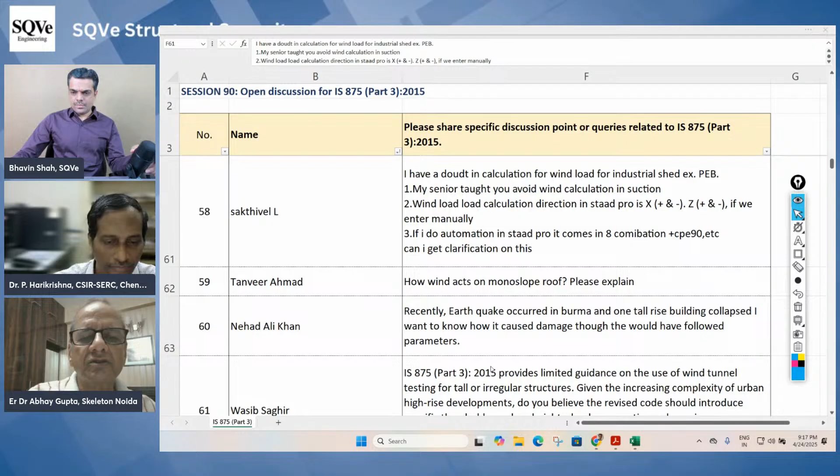Recently an earthquake occurred in Burma affecting a tall rise building - I don't know how it caused damage. Sorry, that's not the purview of this discussion, at least. It was said the code provides limited guidance on the use of wind tunnel testing. We are coming out with a whole new document, but there is a caution word note there which is sufficient - anything not covered in this code has to be tested.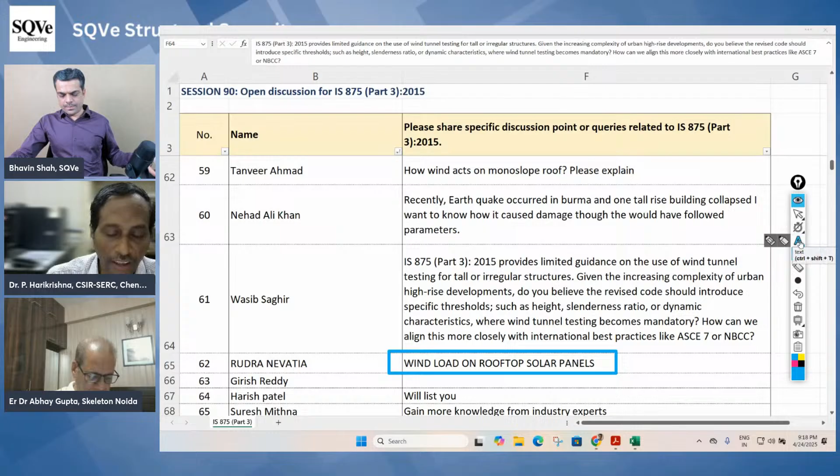Wind load on rooftop solar panel - you can inform Dr. Harikrishna, some work on rooftop solar panels is there. Actually there is a requirement even for ground mounted solar panels. Rooftop solar panels is another side of the spectrum, so this requires a lot of internal investigation. But as of now, the American code already has very good clauses for estimating wind loads on rooftop solars. I also used it very recently for a particular case study - I referred to that code, which is available in the public domain. You can download ASCE 7, latest version, whichever is accessible. That clause is available and I find it comprehensive, so sometimes we can borrow information which is comprehensive in nature. There is much concern, and good documents are available, and we are trying to bring this in.

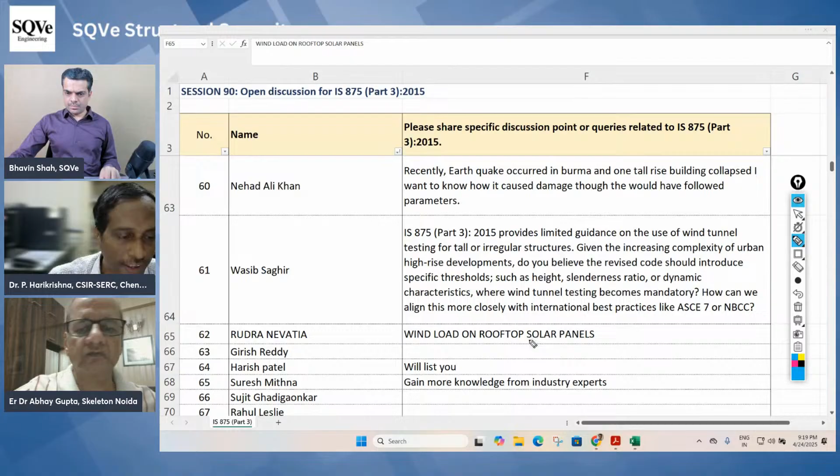For ground-mounted solar panels, very recently the Australian code introduced one clause. In a similar way, we want to also include this in the IS code. Okay, next page.

Which method is perfect to apply the wind force in Etabs? There are two types: pressure coefficient and force coefficient. What is the correct procedure to adopt for the wind load case?

How to take wind? Yeah, Dr. Harikrishna, you may please throw light on this, and then I will also explain.

If your interest is designing a component of the building like a wall material or facade, then pressure coefficients are recommended. For pressure coefficients, there will be external and internal components. The facade is subjected to external pressure from outside and internal pressure from inside. The difference between these two is the net load acting on that structural component, like the wall or facade.

But if I take the building as a whole, then the load estimations are done using the force coefficient. That is the figure 4 approach. In the new revisions, all these coefficients will be updated.

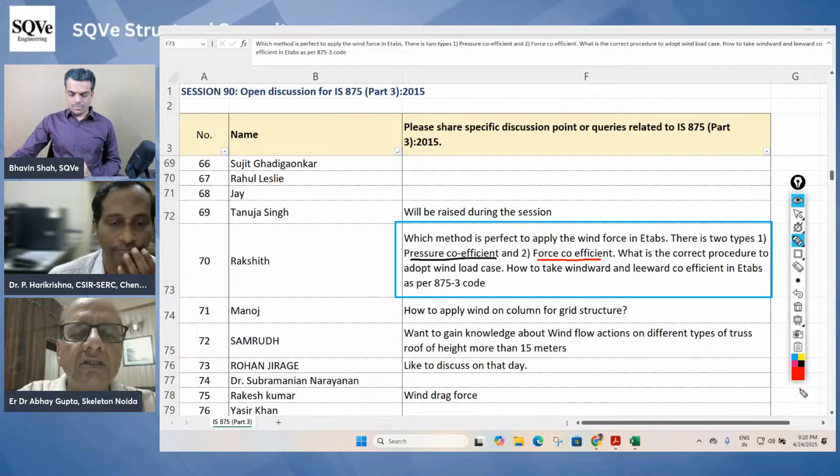There is one more point I would like to add. While working on several projects, we have interacted with consultants, other people, and software companies. They are all applying the story-level wind force as a single point load at the center of the diaphragm, which is actually not the correct case. Wind acts on the exposed face of the building; it never acts on the center of the rigid diaphragm. In my opinion, the wind force should be applied at every story level, but distributed across the width, as is also written in the code.

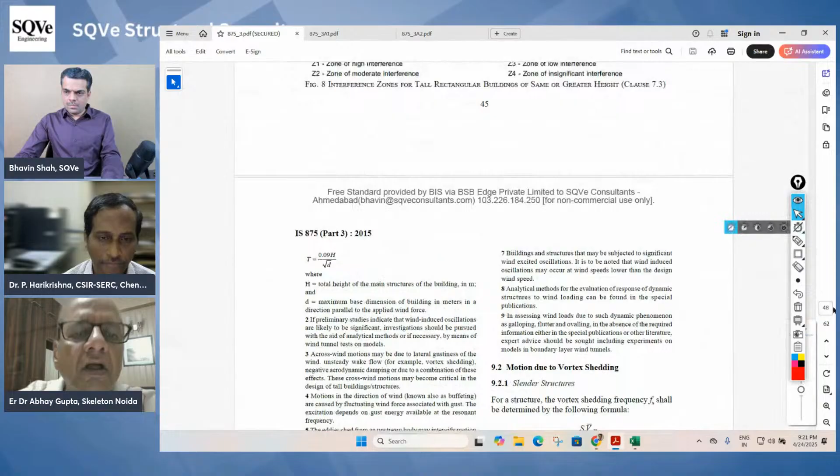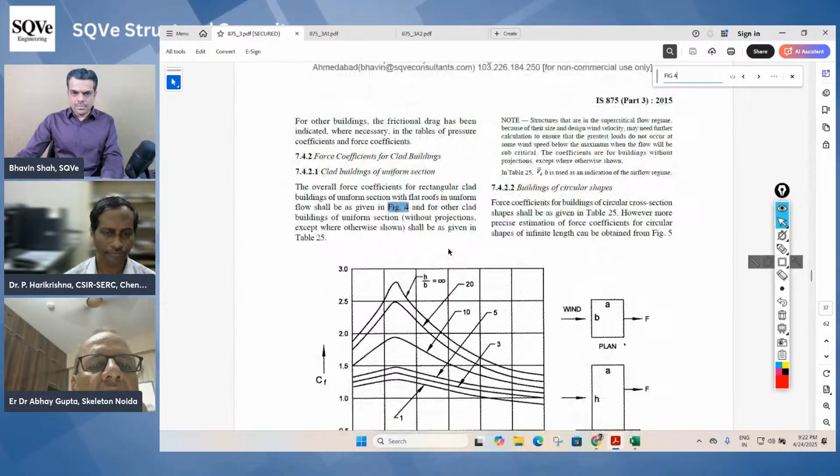Can you open figure 4 and the force coefficient part? Go up a little. No, these are pressure coefficients, not the ones we need. You have to look at figure 4 specifically. Search for figure 4, the force coefficient section, a little further down.

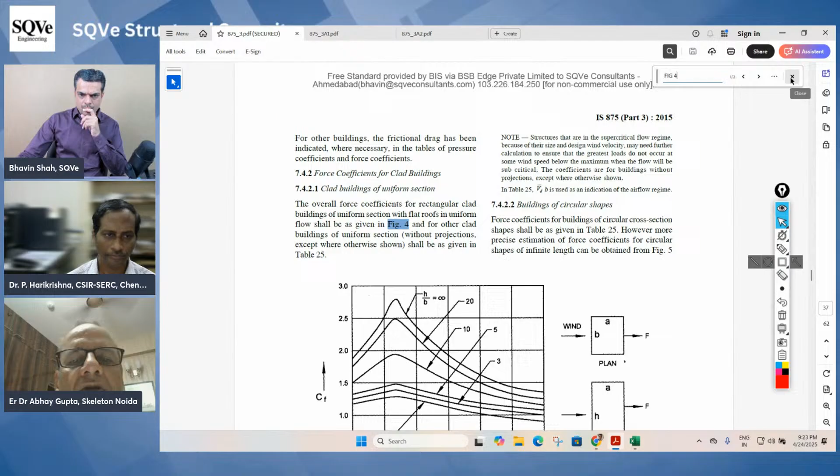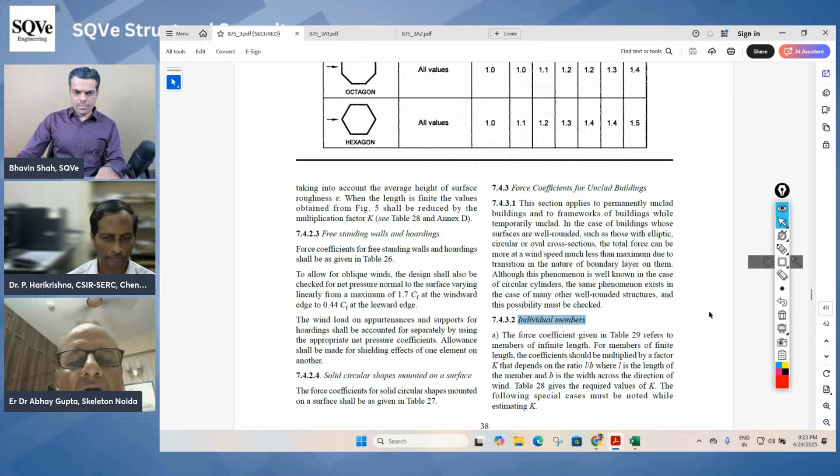Here it is mentioned: the overall force coefficient for rectangular buildings shall be given in figure 4, and for other buildings accordingly. There is a mention that whatever force is calculated is to be applied only on the windward face. I'll highlight that and post it on the group. So whatever force you get from figure 4, depending on height, width and other ratios, that should be applied on the windward face width of the building, distributed across it.

When I discussed this with the wind tunnel people, Dr. Suresh Kumar also said it can be applied as a single point load too. The software people say that for the convenience of the user, they have given it as a single point load, but you can also apply it as a distributed load. The wind tunnel people also agreed that if you want it as a distributed load, they can provide that from their calculations, requiring a bit more computation, but that is fine.

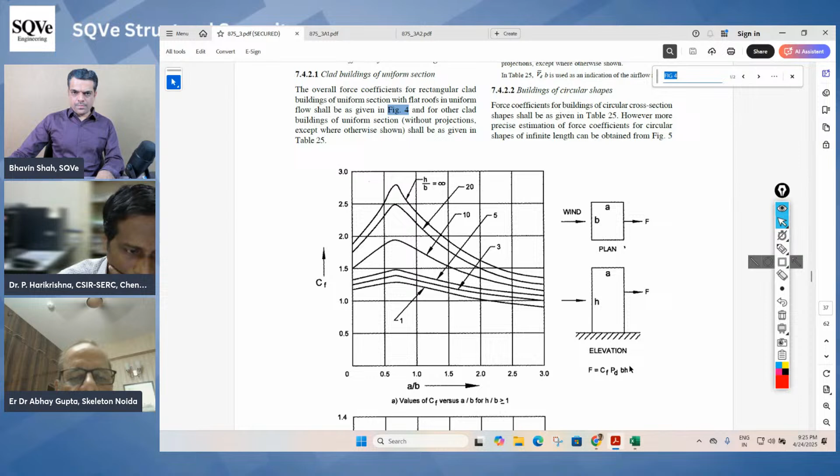Ultimately, when they calculate base forces using high frequency force balance or high frequency pressure integration, the wind tunnel experts can compute the story-level wind forces, whether applied as a single force on the diaphragm or distributed across the width. In my opinion, because the face is exposed, and it is mentioned in the code, I'll find the exact reference and post it on the group, confirming it should be applied on the windward face. So this is my opinion about the application of wind force.

So go back to the Excel. The question was about pressure versus force coefficients. As Dr. Harikrishna explained, pressure coefficient is used for cladding, facade elements, localized areas, or non-structural attachments in the building—that works well there too. But for the building as a whole, the structural frame, and the foundation, the force coefficient approach is the best.

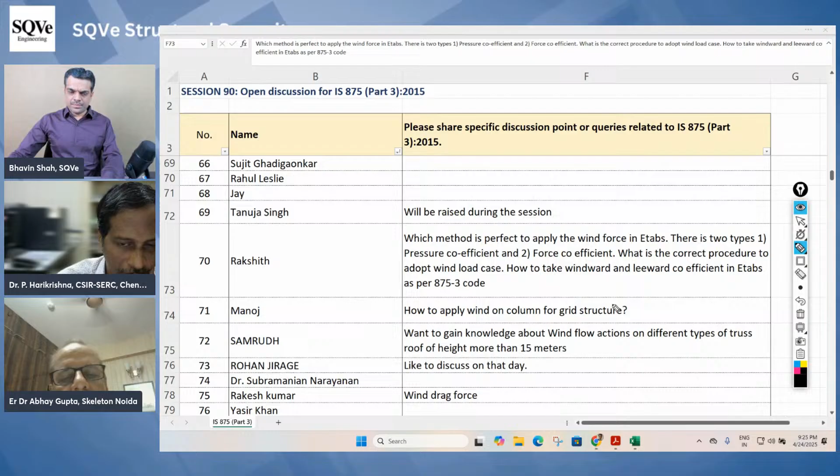How to take windward and leeward coefficient in ETABS? There's nothing like that. You have to apply it only as the windward force, the overall force—that's the overall force coefficient.

How to apply wind on a column for a grid structure? Same way as any other structure. Want to gain knowledge?

Like to discuss on that day: wind drag force, cantilever canopy. Next, please.

I think the rest of the questions, whatever raised, we'll go through to see if any are relevant to be included in the code.

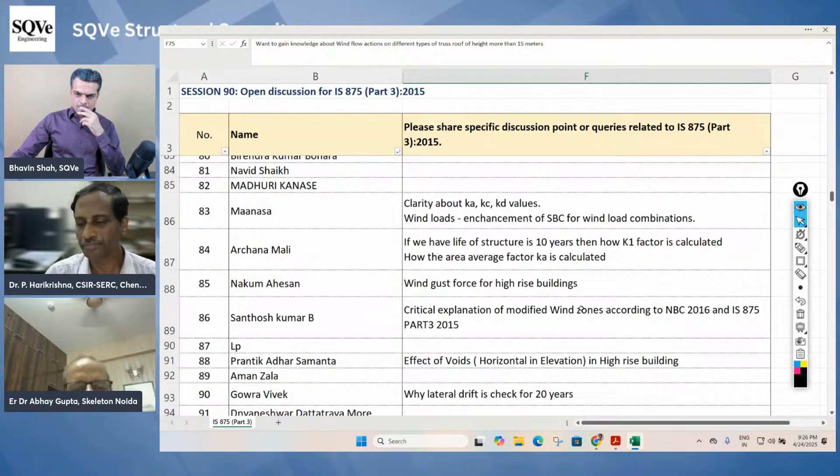But in summary, I'd like to add that the current wind code, which is in practice, lacks input from the users. Whenever we take up an exercise for codal revision, one source is the updation of knowledge and information obtained from various national and international sources. That is what the code committee tries to collect.

Whereas at the same time, there are consultants and field people sitting in the code committee. They expect that when this code is shared for wide circulation, you must give your inputs on the difficulties, or clauses that are not clear or ambiguous and need more clarification.

Even this particular session, I requested Bhavin and it was organized, and we are fortunate that Dr. Harikrishna has joined us, so that we can at least sensitize people using this code in their structural design and highlight these points. So we are getting some very good inputs.

But friends, continue to pour in, continue to write to us with these points, because this code revision process will take a few more months to reach the wide circulation draft. In that period, we will be happy to have more and more inputs.